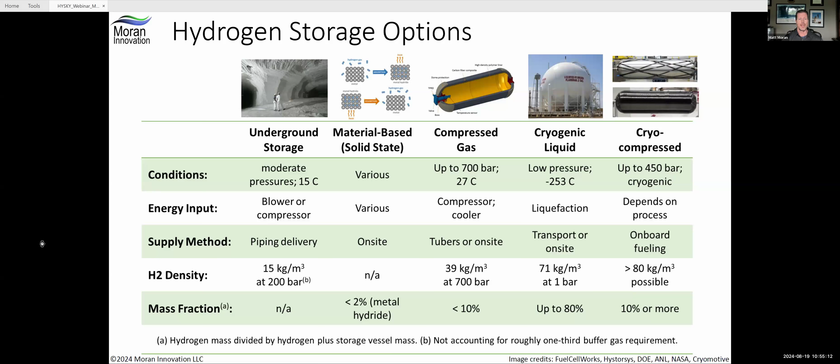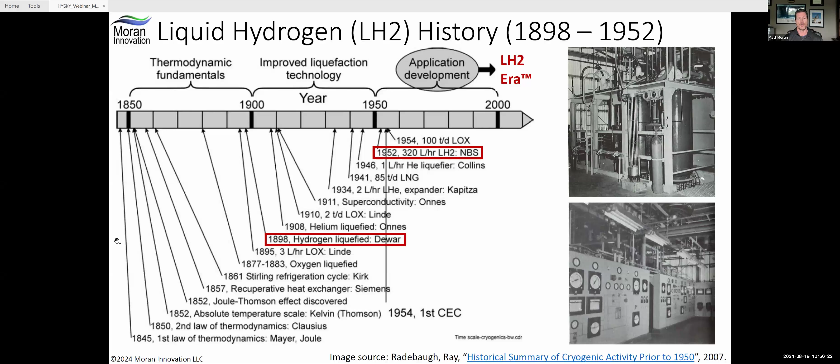And that production of liquid hydrogen has been continuous since that time frame. So a lot of people aren't aware of how long liquid hydrogen production has been in place, and actually the whole supply chain. And we'll talk a little bit about that. A little bit more about the evolution of hydrogen systems. Going all the way back to the 1930s with the development of jet engines, hydrogen was actually the fuel that was used initially for jet engines. It was easy to ignite, easy to throttle the engines and do various testing.

Going all the way back to the 1930s, it has roots in aviation that a lot of people aren't familiar with. And I've got some links in here. If you get the PDF and click on them, you can read some of the articles about some of this historical information. In the 1950s, Pratt & Whitney developed a liquid hydrogen jet engine with an afterburner, and did a lot of ground testing with it successfully.

Checked out very well. It was actually part of spy plane work at that time. It ended up being that the airframer associated with the liquid hydrogen engine didn't do quite as well as the Lockheed Skunk Works folks. So that ended up becoming the first spy plane, and it was designed on hydrocarbon fuel rather than hydrogen. An interesting kind of a diversion, or we might have been in hydrogen for quite a while from back then.

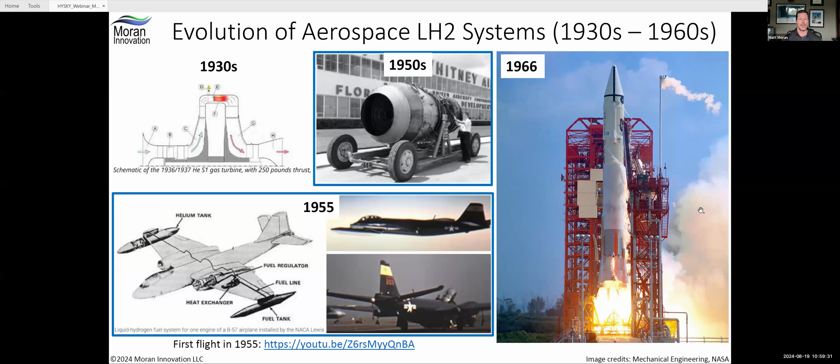Oxygen was then stored with a common bulkhead. This is done fairly often in liquid propulsion rockets, where they have a common bulkhead between them that's insulated. So liquid oxygen at the bottom, and then the engine at the very bottom of the stack for that upper stage. And both of these two upper stages I mentioned were hydrogen.

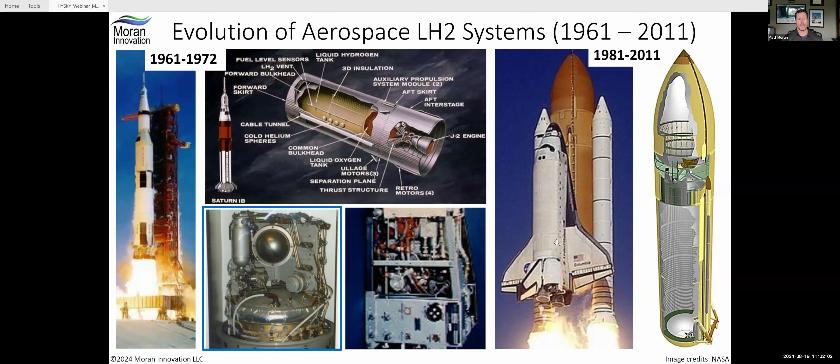And now, bringing it into modern times, there's a number of rocket systems that are in current use and filled that gap between shuttle being retired and now, and are going forward with liquid hydrogen systems. So what I like to point out when I go through this is that we've got 60 years of operational systems, the whole life cycle from production of hydrogen, liquefaction, loading of the vehicle, consumption in the vehicle, fuel cells for power and heat. In the case of space systems, propulsion is primarily what liquid hydrogen is used for on the vehicle itself, all the way up until now and going forward.

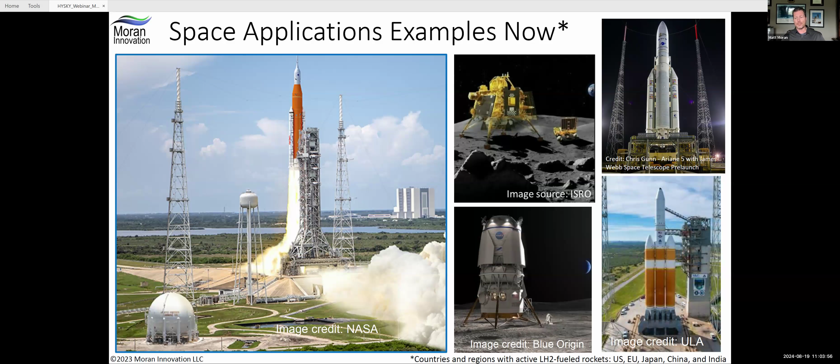So with that, let me jump quickly into what's been developed over the years to support all of this infrastructure on the space side, and where it has application in other industries and sectors. Vacuum jacketed liquid hydrogen dewars are pretty much the most common storage methodology, from ground systems at laboratory scale all the way up to the largest ones currently in use. So these are double wall dewars. The space between the two walls is evacuated, so you've got a very hard vacuum. And then it's filled with various types of insulation depending on the use case.

So what you get is a low heat leak from the environment. Because of that cold temperature of liquid hydrogen, of course, you need to minimize the heat load coming in from the environment. So that's what these double wall jacketed dewars are, named after Sir James Dewar. That's how liquid hydrogen is almost exclusively stored, with a few rare cases, and I'll show you those in a moment. The result is you've got very high thermal performance, for example, 0.5% per day for moderate to large size tanks, much lower for the largest ones. But you can reduce and completely eliminate that boil-off by a variety of methods, and I will talk about that in one of the slides briefly.

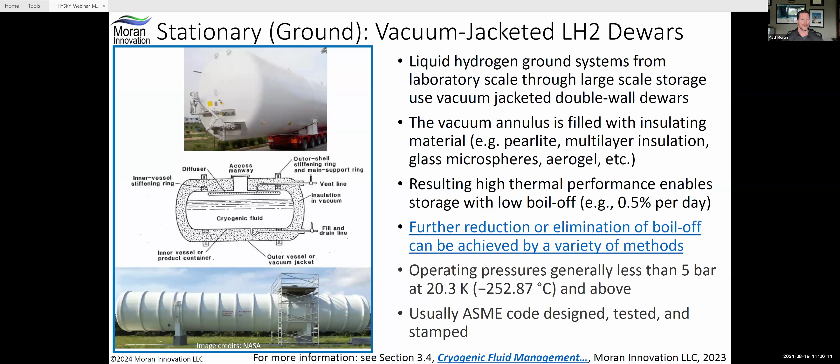Now, the other types of liquid hydrogen tanks that have been well studied, demonstrated, operational, and so forth, are single wall tanks that are used in rocket systems or launch vehicles. These are generally insulated with foam, and that's the way it was done with the space shuttle as well as the new Space Launch System.

The trade-off, which is very important for rockets, of course, is you have much lower weight because you only have a single wall. It's a very thin wall. In some rockets, like that Centaur upper stage I mentioned, it's actually pressure stabilized, which even allows you to get much thinner. However, you've got that high boil off.

So it's a good design choice for launch vehicles, a so-called load and go type of concept of operation, where you're loading quickly, you're topping it off, and then you have high consumption rate throughout the mission. Unless you're operating in that mode, these single wall tanks aren't going to be workable in most cases. They are also low pressure, 2 to 4 bar.

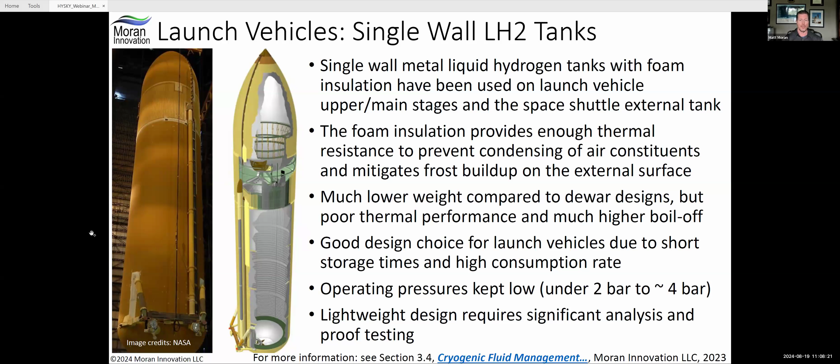Because one of the things you have to do with these very lightweight designs is do a significant amount of analysis and proof testing, since you're not following codes, which give you standard factors of safety that are typically very high. So you have to spend a lot of time and resources to prove out these designs, and then do a burst test as well.

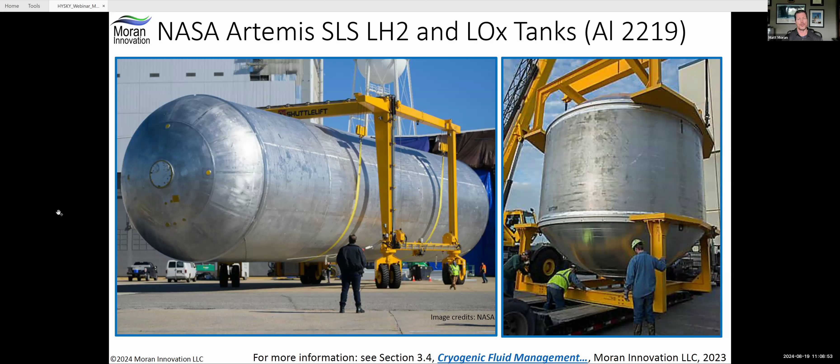Here's a few pictures just to give you a sense of the scale. On the left-hand side is the liquid hydrogen tank for the new SLS rocket. On the right-hand side is the liquid oxygen tank that is integrated on top of it. Again, these are single-wall tanks, both aluminum 2219, which is a suitable alloy for liquid hydrogen service, along with 300 series stainless, which are sometimes used, but not in these rockets. These are aluminum alloys.

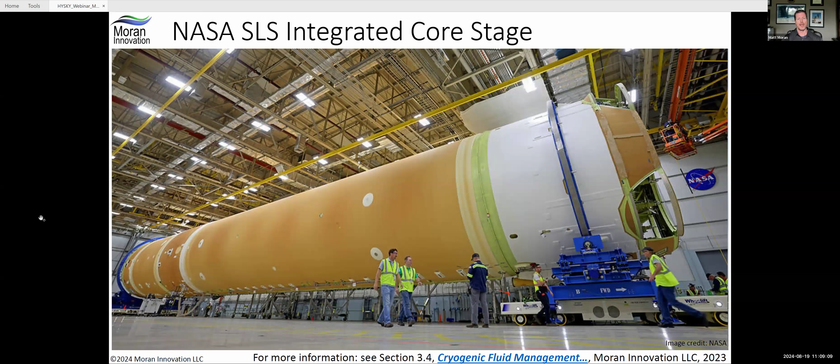And here's a photograph of it integrated together. So you've got the liquid hydrogen in that lower portion taking up most of the volume, liquid oxygen at the top, very similar to how the shuttle stacked it up. And then the engines at the bottom, and you can see the foam on the outside providing that insulation.

So this is the hydrogen tank here, and then the oxygen tank at the top. And if you break it down a little further, these tanks are made from rings that are welded together to provide the overall tank. Now, again, these are single wall tanks.

In a double wall tank, you would have another wall that would be similarly shaped, but then have the appropriate interconnects between fluid connections and structural supports to hold that outer wall in place, or the inner wall relative to the outer wall. But for this rocket, it's all single wall.

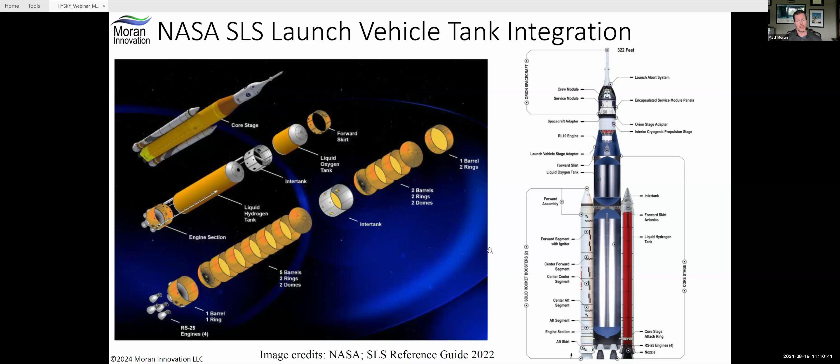You've got kind of a stochastic structural failure. Composite materials don't yield and then rupture the same way that metallics, or metal alloys, do. They tend to more stochastically, or statistically, if you want to think about it that way, fail, where you might bring 10 to proof pressure, and one of them might go and the other 9 are fine. This is not uncommon. It's just a different type of stress that you get in those tank walls when you've got fibers inside of a composite matrix. They fail differently than metals.

Also, permeability of hydrogen is one of the big things when you look at the chemistries for these composites. And a big one is interface connections. It's often overlooked. It's great to be able to make a tank out of a composite, but then you've got to be able to interface your supports to that tank, piping, and so forth. And then, of course, it's got to be able to handle the cryogenic temperatures as well as hydrogen compatibility.

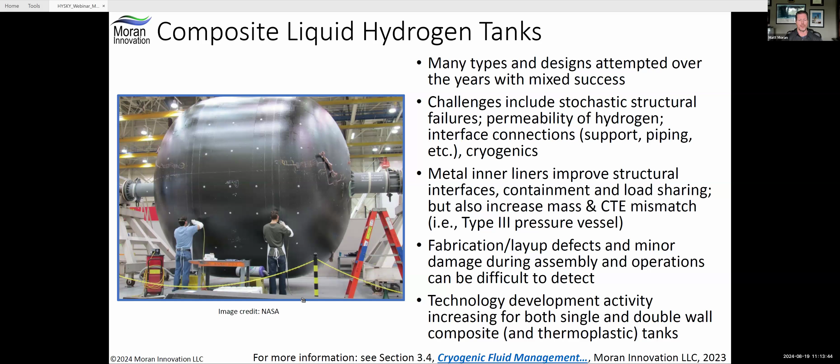But as I mentioned, there's a lot of development going on by a lot of companies in this area. Airbus and NLR in Europe have probably been among the ones very publicly showing some of the work they're doing with this. In the U.S., Gloyer-Taylor Labs has demonstrated some single and double wall composite tanks. So just a few examples of some of the work that's going on in the commercial sector now.

So let me sum up, and I won't go over all of this, but I wanted to provide it in the stack because I think this is where the forward work and the forward challenges are going to be. When you look at ground versus rocket flight test tanks, there's a lot of information around those and a lot is known about them. But when you compare them to what kind of new tanks are going to be necessary for, let's say, aviation applications, since that's the topic of this webinar, there's a lot of unknowns still being worked out, and they're going to provide a competitive advantage for those who can figure out the best approach.

So I talked about the stationary tanks again. These are the type of materials, the type of insulation that's common. ASME code, at least in the United States, has been followed, and they've been certified by that. Very high factors of safety, relatively speaking, 3.5 or more. The maximum fill level usually is about 90% for these tanks, so you don't go much beyond that because you have to have some amount of vapor space because of the pressure buildup that can occur as heat comes in.

Now for launch vehicles, I mentioned the single wall. We already walked through that. Much lower factors of safety. Typically, they're trying to get down on mass, of course, for those rocket systems. Maximum fill levels of 95% or even higher have been done and are operational. Again, they're trying to maximize the amount of fuel and minimize the mass of these systems, which is so critically important for launch vehicles and spacecraft.

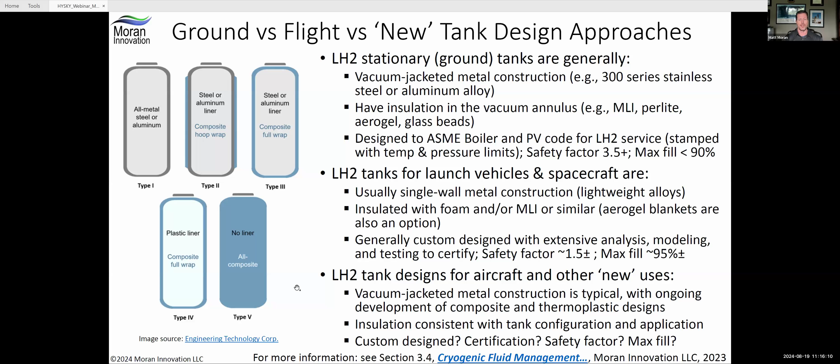Just comparing hydrogen and natural gas, I think, starts to give people a better feel for what they're dealing with. Hydrogen has a much higher heating value per unit mass than natural gas, so more energy per unit mass. However, since the density is much lower, for the same volume we actually have less energy in a hydrogen tank, regardless of whether you're comparing gas to gas or liquid hydrogen to liquid natural gas. So one point a lot of people don't think about in terms of safety: you actually have less energy in that same volume. Auto ignition temperature is actually slightly higher for hydrogen, so it takes a little more ignition energy.

The flammability range is what most people tend to look at, and particularly people who haven't used a lot of hydrogen systems get a little nervous when they see this large range: in air, 4.1% up to 74% is flammable. It is something to be cognizant of and to design and operate with in mind. However, if you look at natural gas at the lower end, 5.3, it's not that much higher. And from a practical standpoint, you're always trying to stay well below that lower flammability limit. So in many aspects, it's not that much different in terms of how much diffusion you want to get in air of any potential leaks in your system.

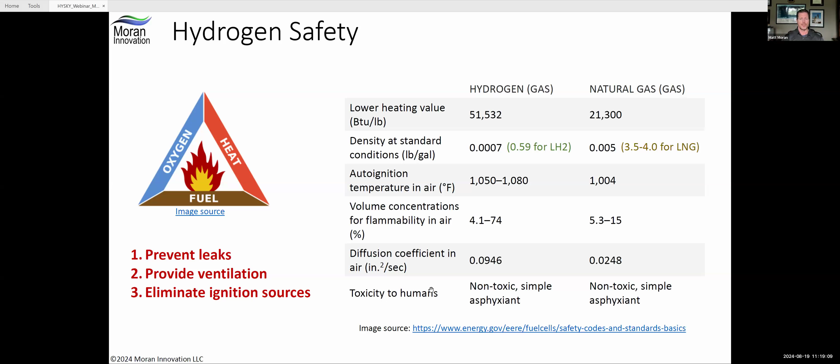Now, hydrogen is a smaller molecule, so it's a little harder to design systems that will operate with a minimum amount of leakage compared to natural gas. But all of this has been tackled and is well known in the industry. The diffusion coefficient in air is much higher for hydrogen than natural gas. Again, this actually helps safety because it diffuses faster when it does escape. Neither of them is toxic to humans, and in fact, hydrogen is used as a deep diving breathing gas in some special applications. So there's no toxicity, but it is an asphyxiant. If the hydrogen displaces enough air in an enclosed container, you could have an asphyxiation issue. Of course, it has to be contained, because otherwise the hydrogen escapes very quickly because of its low density.

Now, when you get to liquid hydrogen, we still have those three mantras I mentioned in the top left. But because of the liquid hydrogen state, a few more things come into play beyond the hydrogen properties we just mentioned. This is showing the temperature range, where hydrogen fits when you liquefy it. Helium is the only other gas that liquefies at a colder temperature than hydrogen, but hydrogen is much colder than liquid nitrogen or liquid oxygen.

When you get into that cryogenic range, you've got to think first about physiological effects, in terms of humans who might be in contact with any cold surfaces that are holding the hydrogen or transporting or transferring it. And then as well, material compatibility and the expansion and contraction we briefly talked about, making sure you've got compatible materials that can expand and contract as needed with that temperature.

The other part of the lower temperature with liquid hydrogen you have to always be cognizant of is the phase change from liquid to vapor, because any amount of heat coming into that stored liquid hydrogen that vaporizes represents a very large increase in the volume. So, going from liquid to vapor, you have a pressure increase immediately. So you've got to look at overpressure, structural failures, pressure relief devices, that sort of thing.

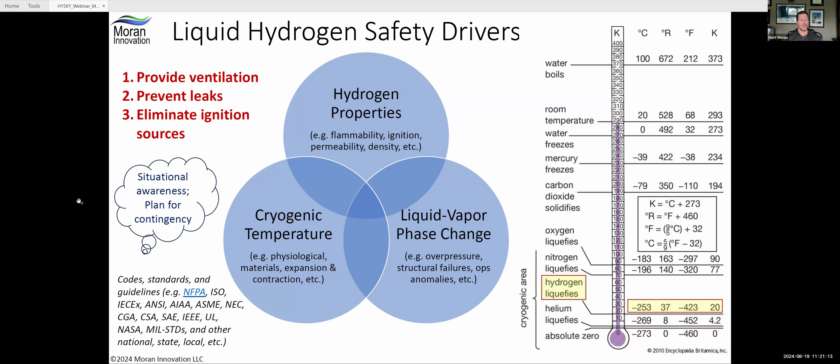I mentioned a few codes down here. Again, it depends very much on where you're operating and where you're putting the system in place, which of these you follow. In the US, NFPA is the first place to go for the fundamental hydrogen code, which points to a lot of these other ones. ISO in Europe and other regions have their own codes and standards that need to be followed. It really depends on your authority having jurisdiction which ones you need to follow. But I threw a few in here just to give some examples, as well as some supplemental material that's available out there. This is way too much to read through, so I'll just highlight.

This is some liquid hydrogen safety considerations, the issue on the left-hand side, and then some example mitigations. This isn't following any particular codes or standards, but just general hydrogen safety. And you can see some of those things we talked about previously that come into play, physiological in terms of frostbite and asphyxiation, as well as sensory. Hydrogen is colorless, it's odorless. There is no odorant that's added to hydrogen like there is with natural gas, so you don't have an opportunity to smell any kind of leakage.

And it's largely invisible flame in daylight. So if you do have a flame, you have to have IR detection or fire detection if you want to detect flames, or if you have a flare stack and you want to confirm that it's operating. At night, it's actually a light blue faint color, so it's not an issue at night, but at daytime, it's largely invisible. Materials and construction, of course, compatibility.

I mentioned the overpressure, burst, rupture, very important. Any trapped volumes in your liquid hydrogen system, not just the storage tank, but piping that was going to have liquid hydrogen where there's the potential for valves to be closed at either end of the pipe that would trap liquid hydrogen, that must have pressure relief in it so that you don't overpressure that section. Ice buildup and air condensation can occur if you have cold surfaces at the liquid hydrogen temperature or getting towards that temperature. Flammability, ignition, we talked about.

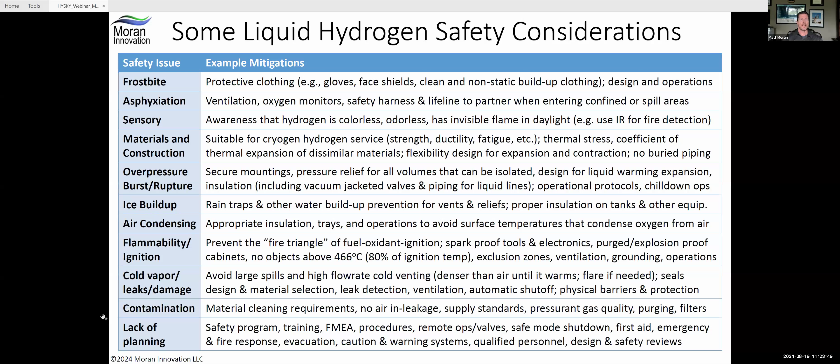And I'll just mention this last one. In my experience, the lack of planning is what comes back to bite projects in many cases. And it's all those mitigations that I show here, basically thinking very carefully through every piece of your design, your operations, your emergency response, safe shutdown modes, all of those kinds of things, having good, not just design reviews, but safety reviews, and how you mitigate your safety concerns. Is there backup to that and so forth? So that's just a quick check sheet, if you will, to think through as you're looking at hydrogen safety for liquid hydrogen.

A few more safe hydrogen things. I'll just mention the things on the right-hand side and then point out what some of the photos are. Material selection I talked about, compatibility. Vacuum jacketed, not just dewars and containment, but piping and valves are very common with liquid hydrogen systems. Almost exclusively vacuum jacketed piping is used. Sometimes valves you can get away with not vacuum jacketed depending on where they're used in the system, if the hydrogen is warmed up enough.

Compatible sensors, you can't just throw regular sensors into these systems. They have to be compatible for cryogenic temperature and hydrogen. I have a link there to, I think, one of the companies that's been around for a long time doing that, Lake Shore Cryotronics, I think it's the full name. Safe operation also includes having the capability for delivery and storage, of course, the system procedures, checkout. The use of, as I mentioned, reviews as well as check sheets.

Cold shock and leak testing is very important. Liquid nitrogen cold shocks are very commonly used. That's what this top right picture is here. This is liquid nitrogen testing, called cold shocking with liquid nitrogen, where you first operate with liquid nitrogen. It also allows you to actually go through various system operations before you get to hydrogen, so you can make sure things are working the way you think they will.

But after this cold shock, you do some leak detection, and any leaks are tightened. Flanges are tightened down where any leaks are detected, or other places. And then that cold shock can be done multiple times until you're convinced you've caught all your leaks in the systems that potentially could happen at cryogenic temperature.

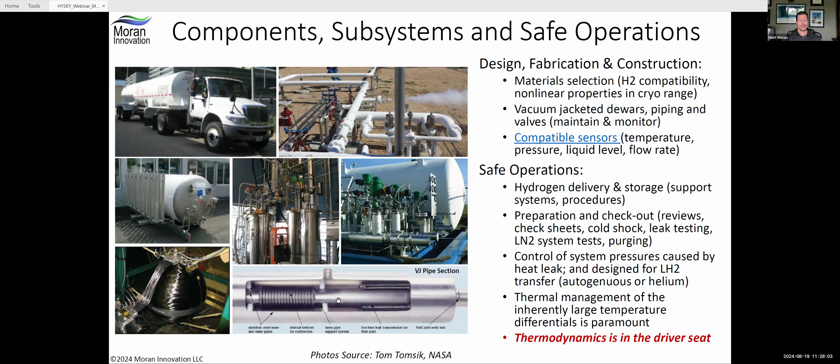You've got standoffs between the inner and outer pipe, but the same sort of general construction. It's evacuated with a hard vacuum between the two pipes, generally insulated, for when you're flowing liquid hydrogen, and expansion joints to handle the warming and cooling of this pipe as it's being used. Yeah, I think that was all I was going to mention on this one.

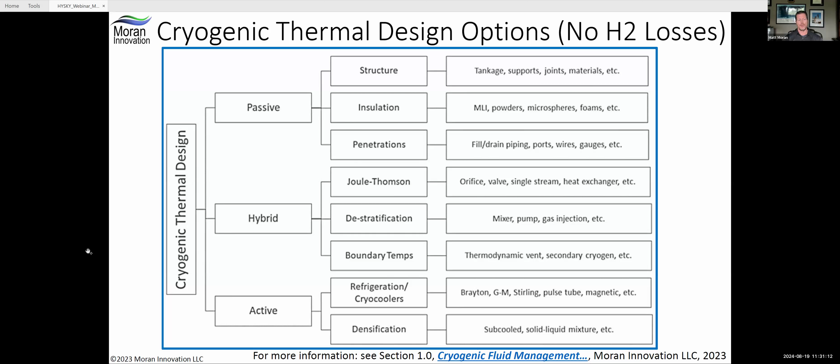industry. I think we're getting close on time in terms of leaving time for Q&A, so I'll cover these last few kind of quickly. I mentioned the insulation types. Here's some photos of them. Everything that's reflective is multi-layer insulation, so it's usually aluminized mylar on both sides, and then Dacron netting in the middle to keep them thermally separated so you don't have a thermal short. And then, of course, in a vacuum, that ends up giving you something that approaches a set of thermal radiation shields that cut down the radiation.

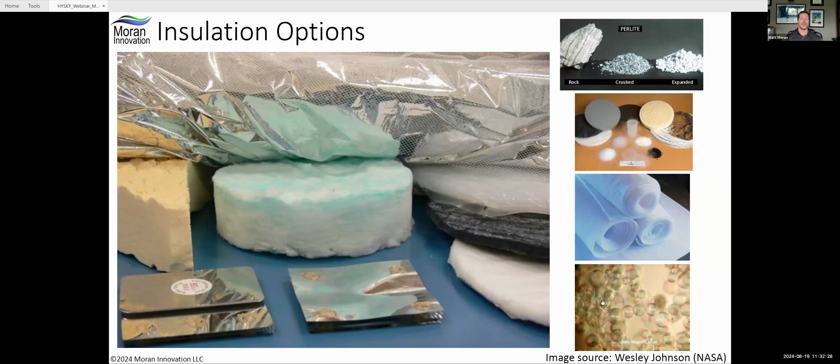There's also foam in this picture on the left-hand side and far left, aerogel blanket, a different type of MLI where, this was a company that developed it, I believe it's thermoplastic standoffs rather than Dacron netting. Some perlite at the upper right has been around for a long time and used for a lot of ground systems. Some more pictures. The ones that look kind of smoky and translucent here are pure aerogels. This is an aerogel blanket. And then microsphere glass beads or bubbles, which are used in the new largest liquid hydrogen container at Kennedy Space Center for insulation, which are better performing than perlite.

This is some data that was recently collected for MLI. I like to point this out because MLI is degraded by seams and penetrations that go through it. So you have to be careful about using any values that you see for MLI that were taken on a calorimeter, for example, because that does not include a lot of these degradation effects. Just as one major takeaway from what they found: about 1 watt per meter squared, whether you're at liquid hydrogen or liquid nitrogen temperature or anywhere between, for about 30 layers of MLI, which is about 1 inch thick, is a pretty good first order rule of thumb for what kind of heat load you're going to get through an MLI system in a vacuum. So if you've got a vacuum jacketed tank.

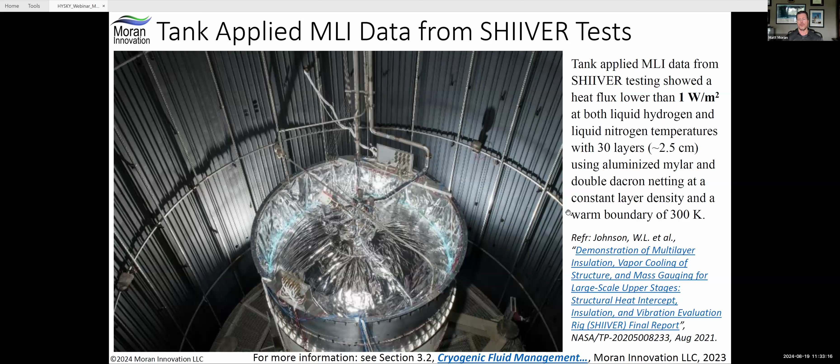I can't go over all these for time reasons, but you can go back and look at these. These are methods to utilize or mitigate your boil-off gas. Of course, you can feed it to a fuel cell for auxiliary power, which is a great way to use it. In spacecraft, we often use it for propulsion, for attitude control, either combusted or expanded through a nozzle. Not probably a lot of uses for that in aviation. Mixing, I mentioned already, you can destratify and lower that tank pressure so you can delay the time it takes for the pressure to get up.

And depending on your concept of operations, you might be able to delay it long enough that you don't ever have to vent or otherwise reduce that pressure. Vapor-cooled shielding, which I mentioned briefly, is where some of your vapor goes around, let's say, a tube on the outer part of the tank, so that when you're using it in a fuel cell, you're also cooling down the insulation and intercepting some of that heat load coming in from the environment.

Thermodynamic vent systems we mentioned briefly already, and zero boil-off systems use cryo-refrigeration systems or cryo-coolers to basically eliminate whatever's left. So you can get into a long-term zero boil-off state where liquid hydrogen can be indefinitely stored without venting, as long as you provide the power to the cryo-refrigeration system. And of course, you can also re-liquefy with those systems.

If you do, let's say, a fill and you've got some vapor that's been generated during fill, you can re-liquefy it. There are companies doing work in this area with products available now, like GenH2. And then combinations of these, depending on your system. This is that new tank I mentioned, during construction. You can see a little more of that double wall construction. The inner heat exchangers are what's providing that zero boil-off. They can be connected to a reverse Brayton cryo-refrigeration cycle, which provides cooling.

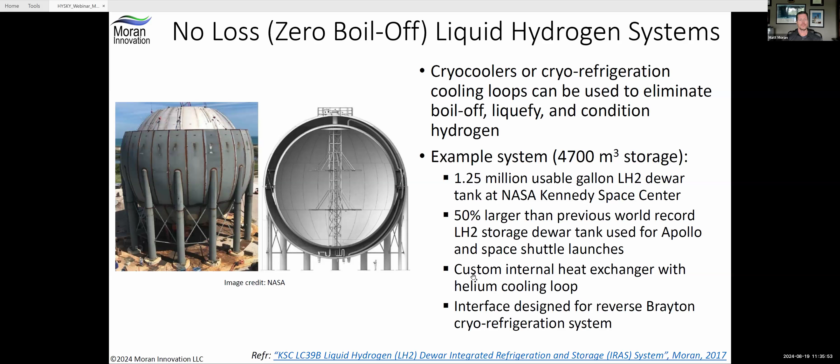And so this is a picture of it all now. The first launch with the new tank was November 16, 2022, where they went around the moon uncrewed, came back and splashed down, a very successful mission. I'll end with this chart, my last chart. This is a mnemonic I came up with to help people think about the key characteristics of liquid hydrogen, and maybe it could be a jumping off point for questions as well. The mnemonic: 2020 vision to the countdown to hydrogen.

The first 20 is the meters per second rise rate of gaseous hydrogen in air at ambient temperature. Very, very fast. So you just have to make sure there's a way for the hydrogen to get up and out, and it will by buoyancy effects. 20 K is liquid hydrogen temperature at 1 bar. Then the countdown starts with 5 safety tips that I mentioned earlier. 4 is how many times the volume of liquid hydrogen is required versus common fuels for the same energy content. But you have to remember efficiency. If you're using a fuel cell, it's much more efficient, of course.

However, there's 3 times the energy in terms of mass. That's what this chart on the left shows: horizontal is energy per unit mass, vertical is per unit volume. So remember those are the trade-offs you're making with liquid hydrogen when designing your system. 2 spin states, ortho and para. It's very important to know this when working with properties for liquid hydrogen, which is close to 100% para hydrogen, whereas at ambient temperature it's about 75% ortho. So you have to know that when you're looking at properties.

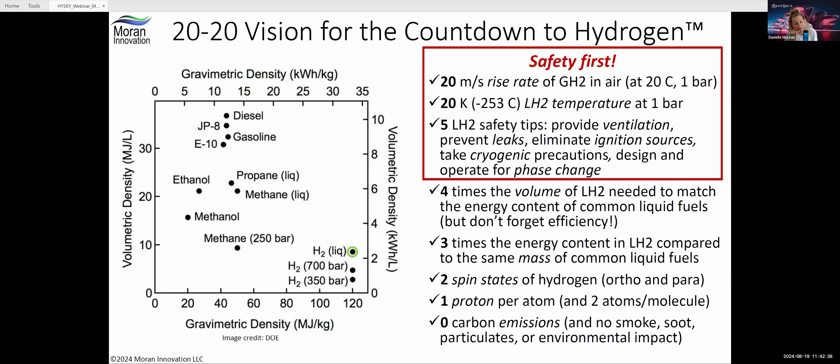Well, beyond the passive stuff, of course, which is all designed for. Sorry to interrupt, but can you go back to that slide? Oh, sure. Where the first two you said they don't really, I can't remember. I think the third one was mixing. Yeah. This one, yeah. Up there.

So I definitely would use all the passive techniques, of course, in your design. And then probably, if you're feeding, I'm going to assume it's a fuel cell power propulsion system. I think that's what most aircraft are looking at now, although it could be a jet engine as well, which I know Airbus and others are looking at. The first thing I would look at is when you're feeding you've got to warm up that gaseous stream anyway to put it into your fuel cell.

So why not use that cooling that you have from your vapor and use it to either wrap around your tank or to wrap around key penetrations that are driving heat load into your tank. And there's other things you can do too, but you basically want to, from a system standpoint, maximize your heat exchange so that you're not losing or wasting that cooling capacity of your vapor stream.

And then if you can get that vapor stream pretty close to what your inlet fuel cell requirement is, and you've done it by reducing your heat load to your tank, you're in great shape. And in some cases, that might be enough to keep your pressure increase low enough in your storage tank with whatever your consumption rate is during flight. That's all you need to do.

I know there are some companies that are looking at onboard active cooling, but I think it's probably going to be a less typical case to justify the power and the mass to have that on, unless you have very long periods of dormancy, which is going to be unusual, I think, and it would probably be on the ground before takeoff, where you might want to have some sort of active refrigeration. It might not have to be necessarily on the aircraft. It might be part of your ground support system. So those are two things that come to my mind.